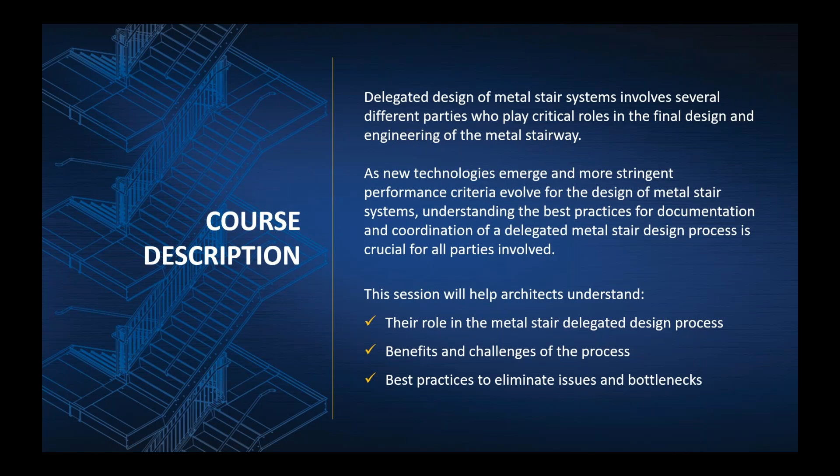This course will help architects, one, describe the delegated metal stair design process and how the roles of each party can increase the safety and efficiency of a project. Explain the benefits of a delegated metal stair design process and how it ensures a safe and durable installation. Discuss the best practices of documentation, BIM coordination, and information flow required throughout the process.

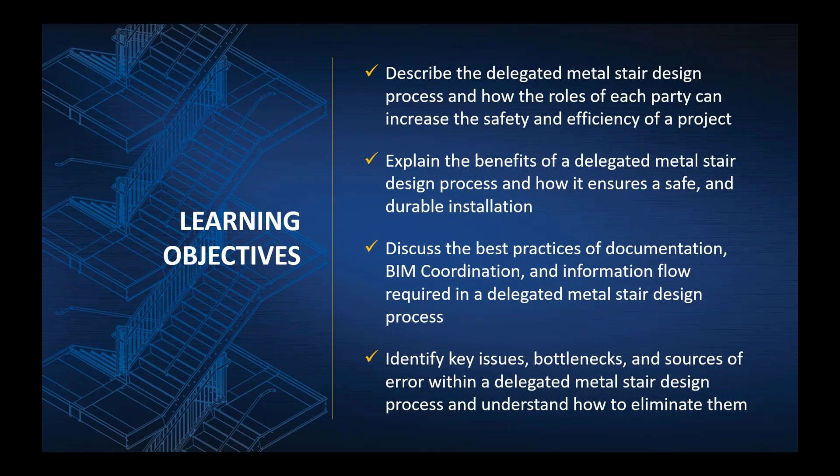And then identify key issues, bottlenecks, and sources of error within a delegated metal stair design process and understand how to eliminate them. So I'll start with just a brief overview of the delegated design process in general and how it relates to metal stair systems.

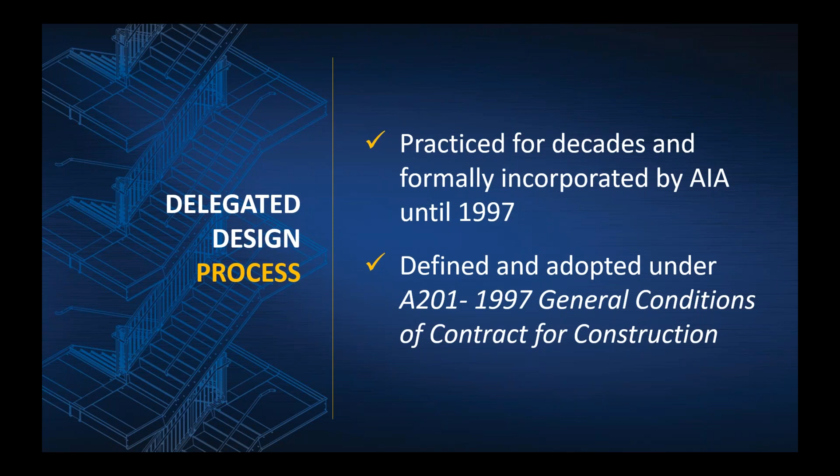The delegated design process has been practiced for many decades. Not until 1997 was it officially adopted under the AIA document A201, General Conditions of the Contract for Construction. And in this document, the AIA inserted the language that must be included for the scope of work to be considered design delegation.

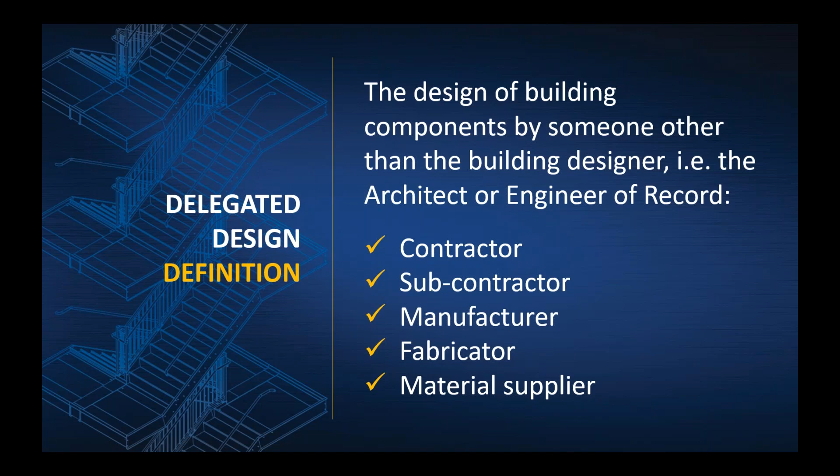And the general definition is that design delegation is design of building components or equipment by someone other than the building designer. It can be performed by the contractor, subcontractor, or equipment manufacturers or fabricators. And it's typically used when components or specialty equipment require specialized engineering skill and know-how, and when the components may differ depending on the chosen solutions.

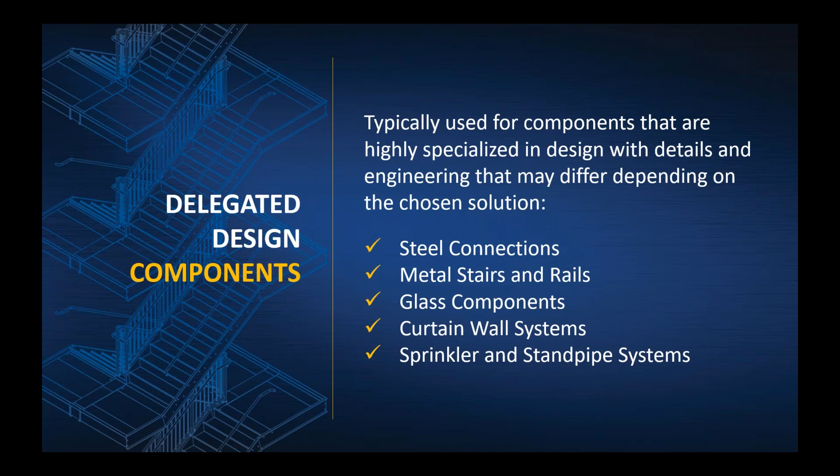So for instance, with metal stairs, they require design of many different connection details and components, and each manufacturer will typically incorporate their own set of different typical details and designs to fit their manufacturing system, while also meeting the design intent of the architect. So having these details designed directly by the manufacturer helps ensure that they are able to be manufactured in a high quality, safe, and efficient way for the project.

Next, we'll walk through the reasons why a delegated design process is used and the benefits. The goal of incorporating delegated design for metal stairs is to lower overall cost, improve the safety and performance of the stair systems, and improve coordination and efficiency of the design process. And we'll talk a little more about how each of these can be achieved.

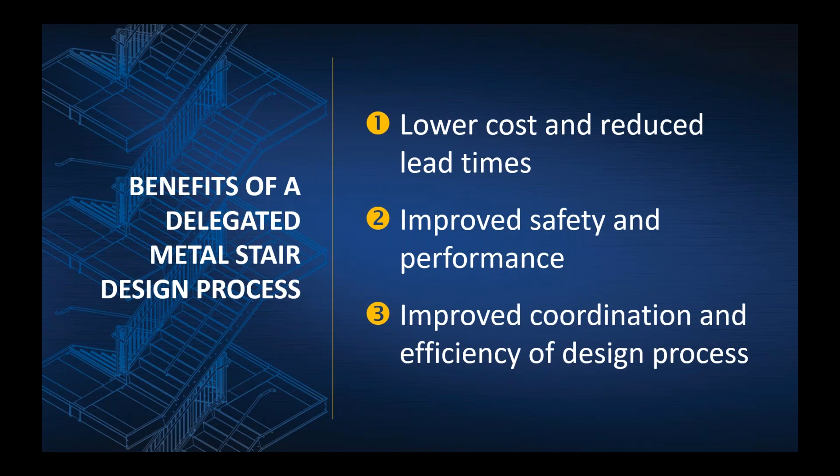So how does it result in lower cost and reduced lead times? Because the designers and engineers work directly for the manufacturer, they will be intimately familiar with the manufacturer's standards for manufacturing. So they will design with manufacturing cost and efficiency in mind. They will also have an in-depth familiarity with installation requirements of their stair system, so they can design for minimal field welding and handling on site.

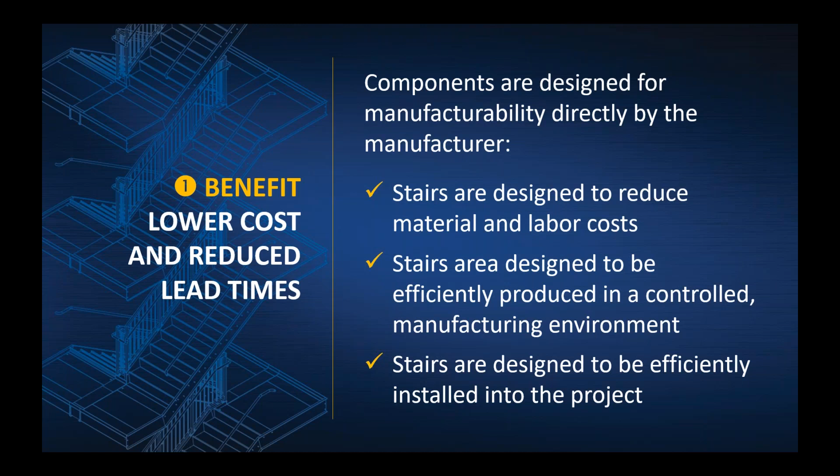The specialty engineer will also have an in-depth knowledge of the specific IBC load requirements and AISC guidance for stair design, so that all of these stair components will meet the load requirements, and the connection details will be designed per AISC guidance. And this is important because it ensures that the stairs will be designed with maximum safety and durability in mind.

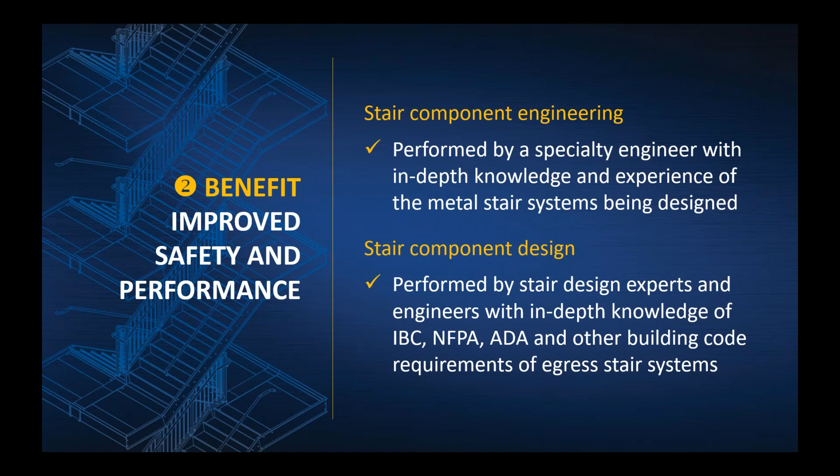And then finally, a benefit is that it reduces design time for the architect or building designer in a couple of ways. One, the architect can incorporate information directly from the stair manufacturer into their documentation, such as typical details or specifications. The other way is that it delegates the detailed design work to the manufacturer, who will typically have more in-depth knowledge of the details of their systems, and will also have many aspects of the systems pre-engineered or pre-designed, which further contributes to a faster, more efficient process and frees the architect to focus on other design aspects of the project.

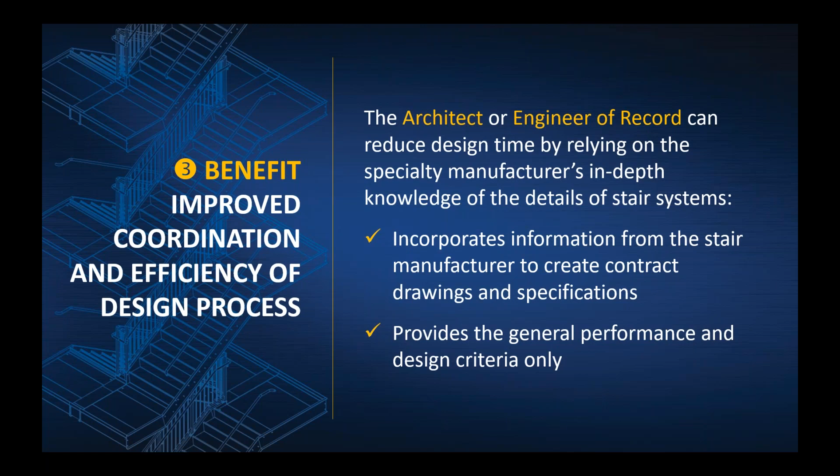In this next section, I'll talk about the roles of the architect and stair manufacturer and the documentation provided by each. The AIA document A201 provides the framework for the delegated design process. And first, it requires that the architect specify clearly that the scope of work in question, in this case, the design and engineering of the metal stair systems, is intended to be a delegated design component. And that should be clearly stated in the contract documents.

Second, the AIA A201 document requires that the architect specify the performance and design criteria for the metal stairs, and that the design of the metal stairs require professional design services or certifications related to the systems being provided.

And then finally, the architect would be responsible for reviewing and either approving or taking the appropriate action for the shop drawings or other product or quality submittals by the stair manufacturer, and checking for conformance to the design and performance criteria. So in this role, the stair manufacturer will be responsible for submitting a design which conforms to the contract documents, while the architect is ultimately responsible for reviewing and ensuring that it does conform to the contract documents, and particularly to the governing building code.

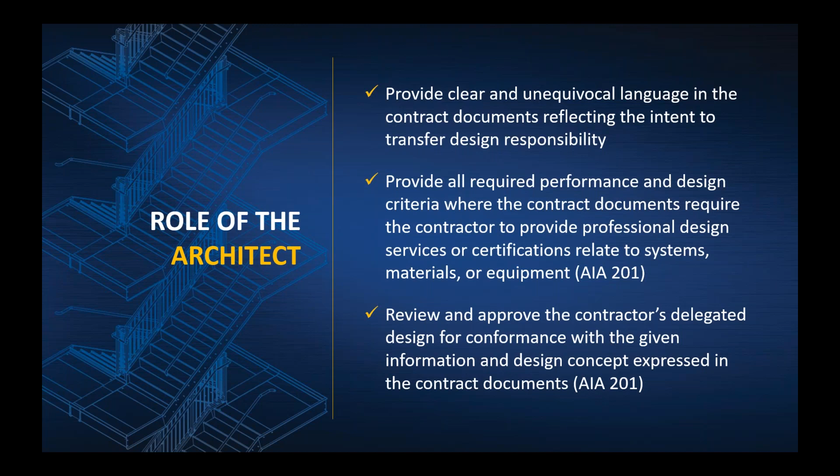The role of the stair manufacturer in the process is also threefold. First, the stair manufacturer must carefully study and compare the contract documents to understand all the design and performance criteria indicated in the documents. This will generally include a review of the architectural drawings, structural drawings, and notes in the Division 5 stair specifications.

Second, after conducting the review, the metal stair manufacturer should report to the architect any known errors, inconsistencies, or omissions discovered. And this would pertain obviously only to the specific metal stair scope of work. And I'll go through a little later some of those common issues discovered during this review period.

And then finally, the manufacturer should design the metal stair systems to conform to the design and performance criteria as indicated in the contract documents, and must make the appropriate submittals to document that conformance.

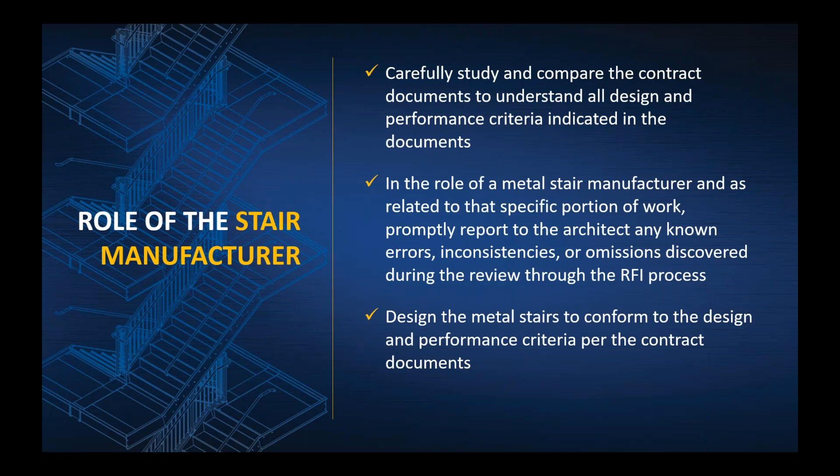In this section, I will provide an overview of the design documentation and submittals required for a metal stair delegated design. The primary source of information for the stair manufacturer from the architect is the set of contract documents, and this will serve as the governing documents to which the stair manufacturer will conform their design. The documents, as it relates to metal stairs, typically include the architectural and structural drawings and specifications.

Often the architect can also provide BIM models of the building or stairwell. And the BIM models can be extremely helpful for the stair manufacturer, especially in identifying and locating clashes between the stair system and the surrounding building structure. One important consideration is how the BIM models should be incorporated into the design, and whether they should be used as a reference document or as a governing design document.

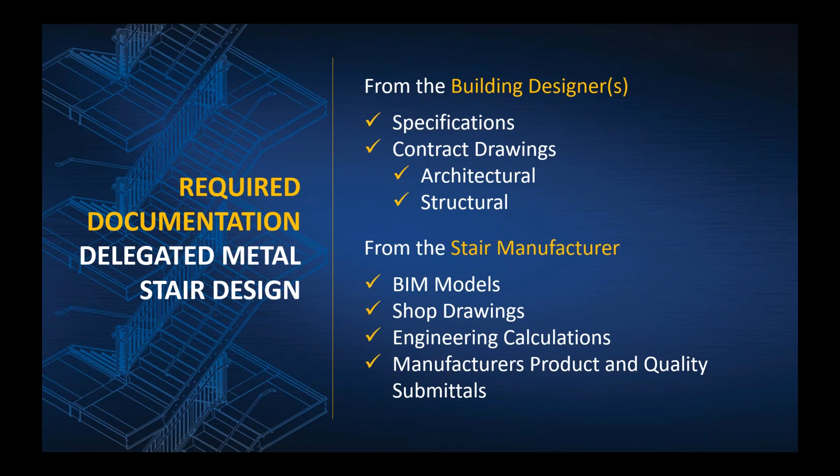So prior to use of models, the stair manufacturer will want to have some documentation as to how the BIM model should be incorporated. And then documentation from the stair manufacturer will include a series of submittals, typically BIM models, shop drawings, engineering calculations, and any other product and quality submittals. And this is an overview of the documents and information that should be included in each document.

The information from the architect as laid out in the architectural drawings will usually include stairway layouts, egress dimensions and layouts, direction of travel, stairwell dimensions, of course the governing building code, and then details to indicate design intent for guardrails, handrails, and other product information.

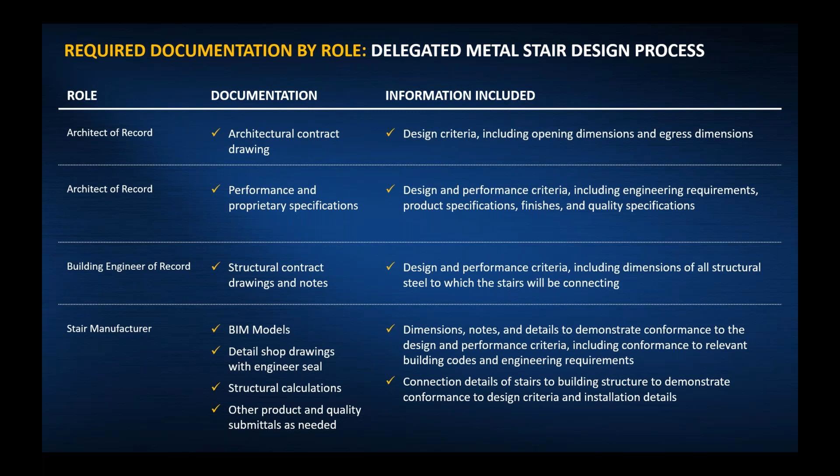The engineer of record would provide additional information through the structural drawings and notes and details in the structural drawings. And the information from the structural drawings would generally need to include slab and beam dimensions and sizes to which the stairs are connecting. And then again, the stair manufacturer will provide a series of submittals to demonstrate conformance to the contract documents, and we'll go through those in more detail.

If it's an IBC accessible stairwell, the distance between handrails might be relevant. And then, of course, typical details to show the design criteria of the treads, risers, nosings, guards, and handrails. And we'll go through some examples in the next few slides.

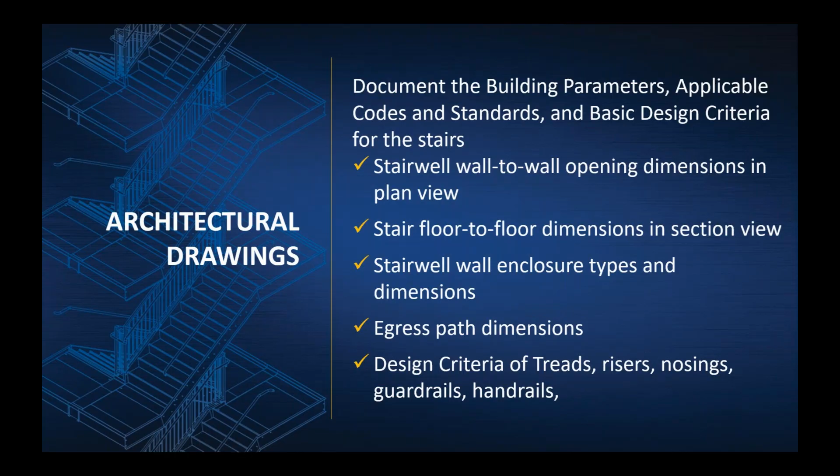So typically the architectural drawings will include enlarged plan views of the stairwell openings to indicate all the necessary dimensions. Two of the most important dimensions are the wall-to-wall overall stairwell length and width. Also on these enlarged plan views, the door locations.

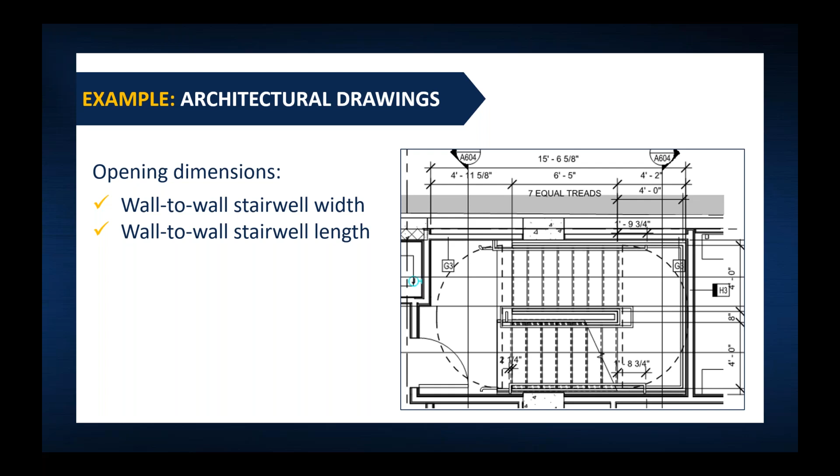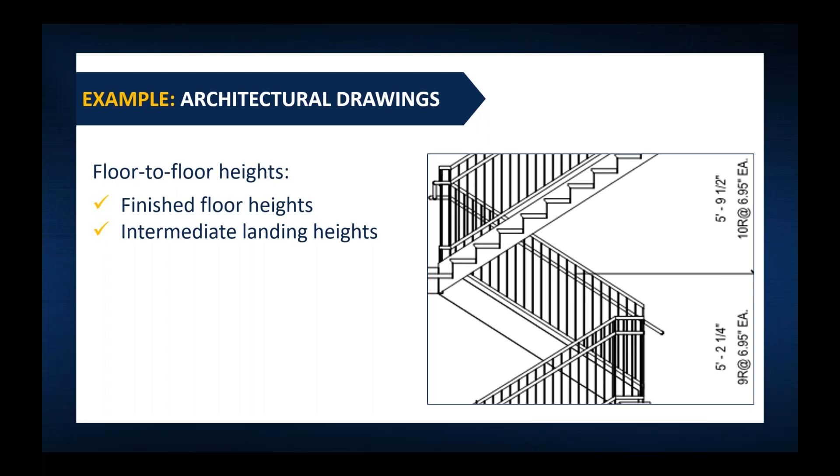And the enlarged section views typically will show the finished floor-to-floor heights, which is the most important dimension needed for the stair manufacturer, the intermediate landing height, and individual stair riser heights. And if the intermediate landing heights and stair riser heights are not indicated, the stair manufacturer will typically assume an equal riser and flight height for each of those.

The enlarged plan views should also indicate the wall construction and wall types and the widths of the wall enclosure, which is needed by the stair manufacturer to design the landing supports, which are typically hidden inside the walls. The stair egress widths, which is the clear width above the handrails between guards and or walls. The landing widths.

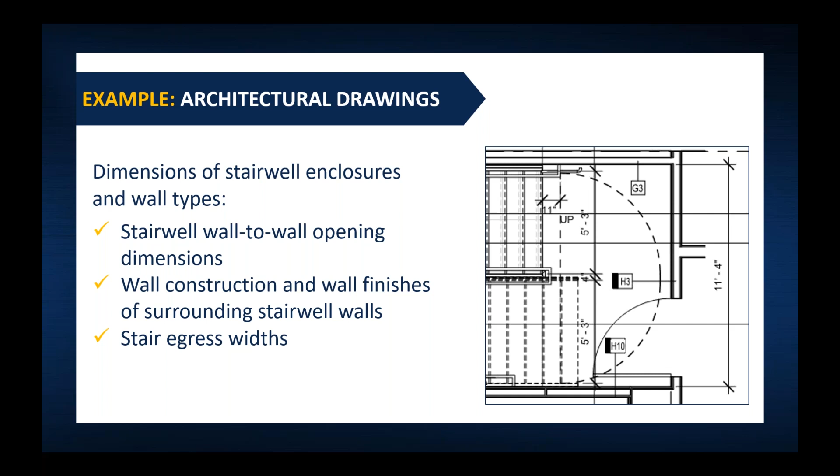In the details section, there will be a few general design criteria details needed by the stair manufacturer to successfully design the stairs, starting with tread and riser design intent. Most importantly, the tread type. In this example is a concrete pan stair. Riser heights and tread depths, and here is showing the 7-inch max riser and 11-inch min tread per IBC.

The riser type and whether it's a closed riser or open riser. And an important note with architectural details and how they are incorporated or used by a stair manufacturer. The stair manufacturer will have its own standard details for treads and risers, which are designed to reduce costs and lead times for manufacturing. So including a note here in the details section that the stair manufacturer's standards will be acceptable can help clear up some confusion later on in the process.

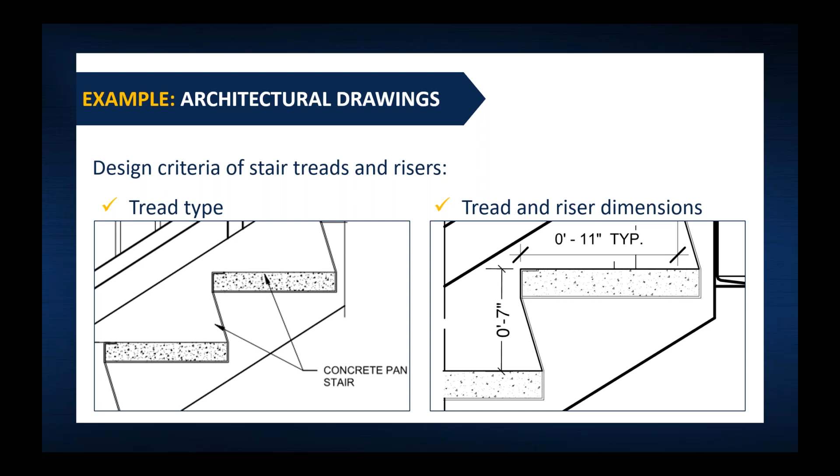The guardrail details primarily will indicate the design intent and the code criteria. From a design intent perspective, the details should indicate the guardrail infill design, in this case a vertical picket type guardrail. The posts design, including if there are any specific material types or profiles for the guardrail posts and frame, and then the handrail design.

From a code perspective, the primary items and dimensions the stair manufacturer will be looking for are the guardrail heights, handrail heights, infill opening spacings, and handrail extension dimensions. If these dimensions are not all indicated on the architectural drawings, the manufacturer will typically design the railing per its own standards to meet the applicable building code.

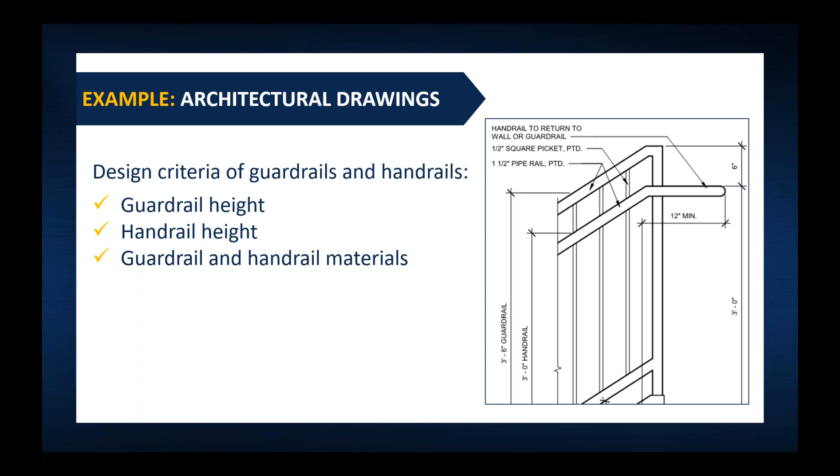And again, as noted in the last slide, the stair manufacturer will have its own standard guardrail and handrail designs to reduce costs and lead time, which can often differ in small ways from architectural details. So including any specific notes as to which details should be strictly adhered to, or if the manufacturer standards will be acceptable, is always beneficial.

Next, we'll go through the information in the specifications. Before I go through the specific information, I'll run through a quick overview of the different types of specifications and how they relate to the delegated design process for metal stairs. A performance specification is the most common type used in this process, and it dictates the performance requirements, but allows for multiple manufacturers to propose their own systems, and allows for freedom for the chosen manufacturer to design using their own standard systems.

A proprietary specification can also be used here. It's typically a specification that is used with a stair manufacturer's proprietary system, whether it be a performance, tread, or railing system. And then a prescriptive specification, typically not used here because it would defeat the purpose of the delegated design process, which is to gain the efficiencies and reduce costs by leveraging the stair manufacturer's knowledge in stair design and engineering.

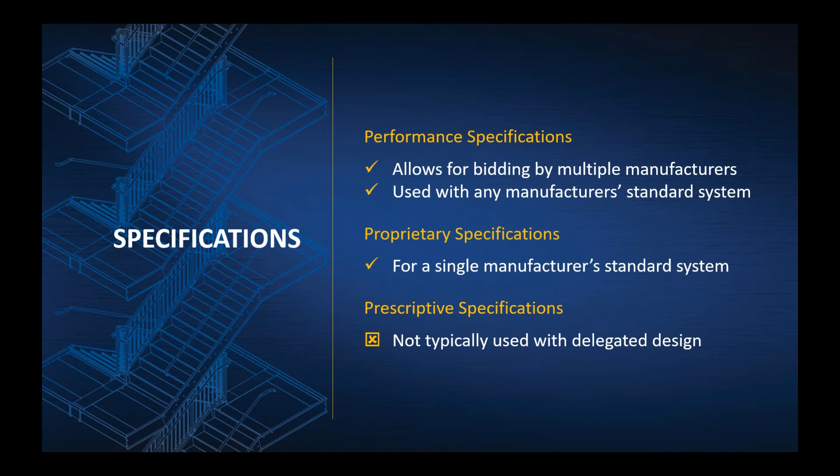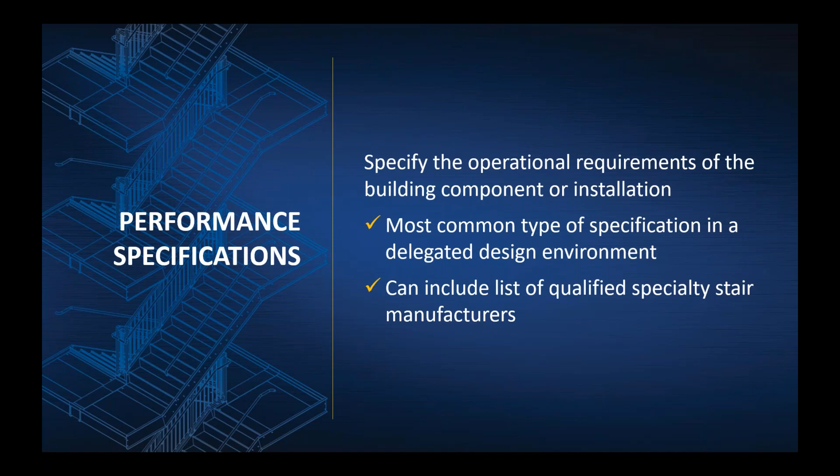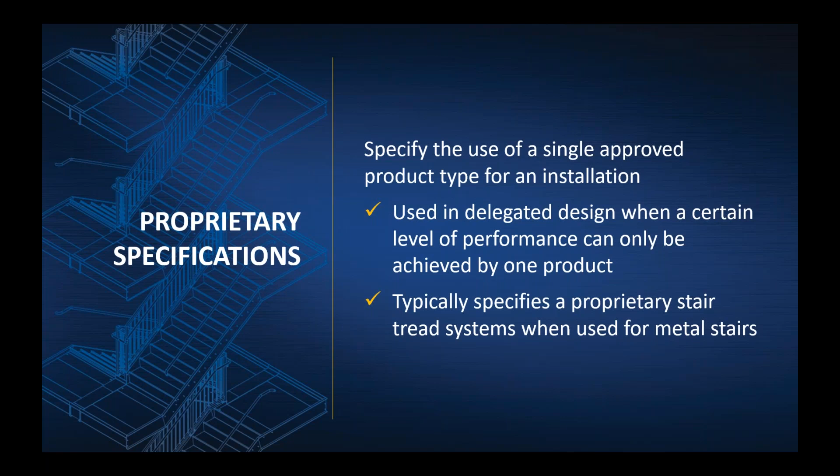So again, the performance specification, most common type used, and it allows for multiple stair manufacturers to propose their systems, and it often can include a short list of qualified manufacturers to meet the performance criteria. Again, a proprietary specification is typically used when a certain level of performance can only be achieved by a single product. In this case, relating to stairs, typically when there is some sort of performance tread or railing system. And as discussed, the prescriptive specification is not often used.

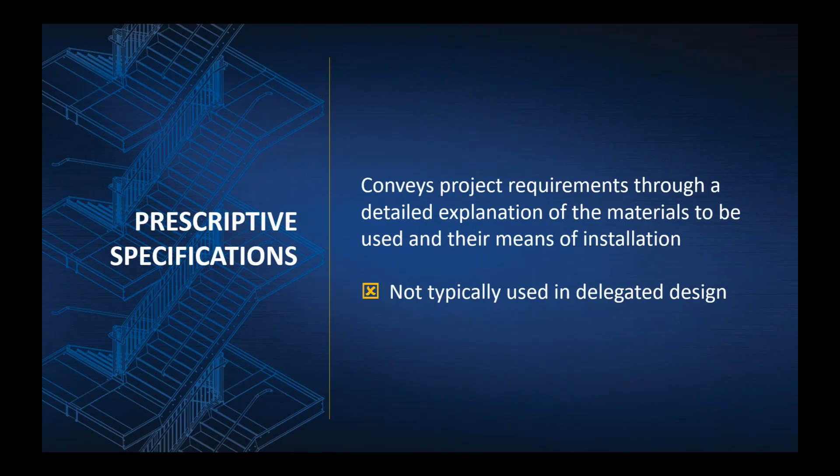The specification will have additional information needed to design the stair systems. First, most importantly, the engineering or structural performance requirements for the stairs and guardrails and handrails, usually per IBC live load specifications. It will also usually include a manufacturer's qualification statement, product and material requirements, submittal requirements for shop drawings, quality, LEED, or other product information such as samples, finishes for primers, finish paints, and weld finishes, and then of course installation requirements.

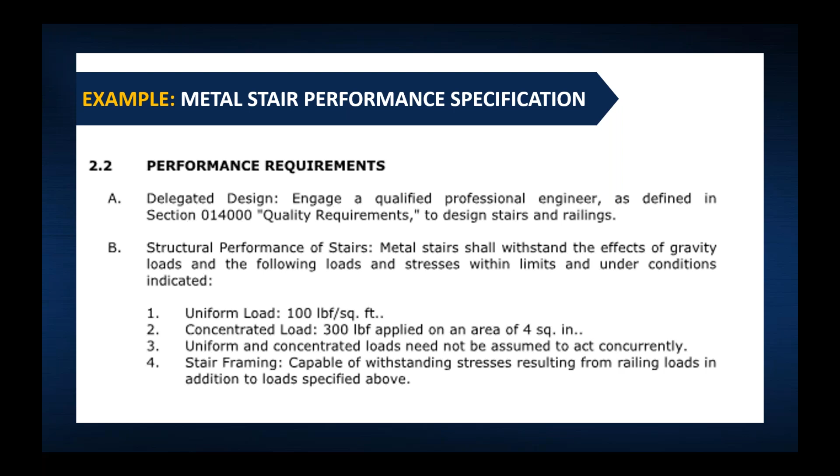So what is needed in the performance specification? One of the important criteria listed in the performance specification is the requirement for enlisting a professional engineer to oversee the stair design and stamp and seal the drawings. And again, it'll also usually include the structural performance of the stairs.

Additional information: it will list the manufacturer's qualification for quality. The specification document should list some minimal quality criteria for the design of the metal stairs. And this might include that the stair manufacturer should have a minimal number of years performing similar work. Stairs should be designed under the direct supervision of a structural engineer licensed in the state of the project. And then all welders should be qualified under an AWS certified weld inspector.

Other design criteria that may be included can indicate the level of finishes for the welds of the stairs. And there's two organizations who have created standards. The National Association of Architectural Metal Manufacturers has classified stairways by different classes according to different uses. Industrial class stairs are primarily functional with limited weld finishing. Service class stairs are also primarily functional but designed with appearance in mind. Visible welds in the travel area would be ground smooth.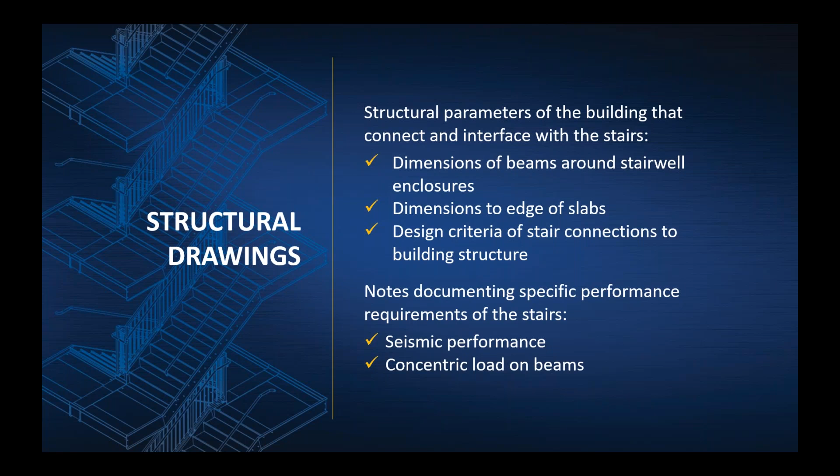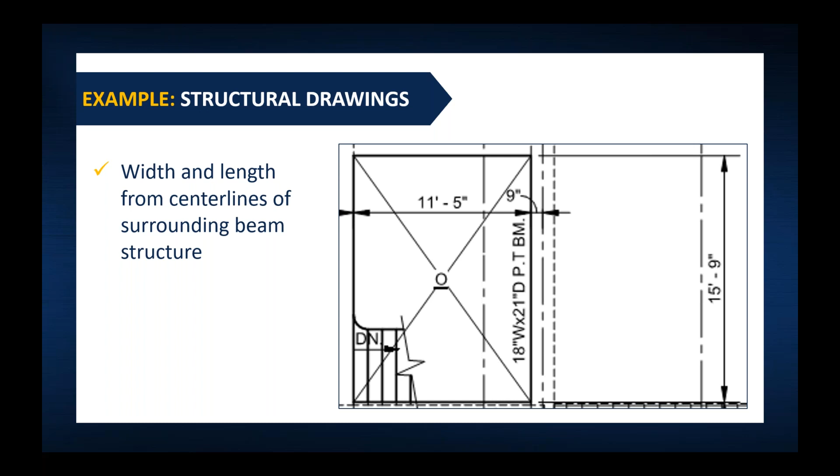In a structural steel building, perhaps the most important dimension required for designing the stairs is the stairwell opening dimensions from the center line of surrounding structural steel beams, which is needed to design the connections from the stairs to the beams. In a steel building with floor slabs, the dimensions from the floor slab to the center of beam is necessary to design the connections from the stairs to the floor levels.

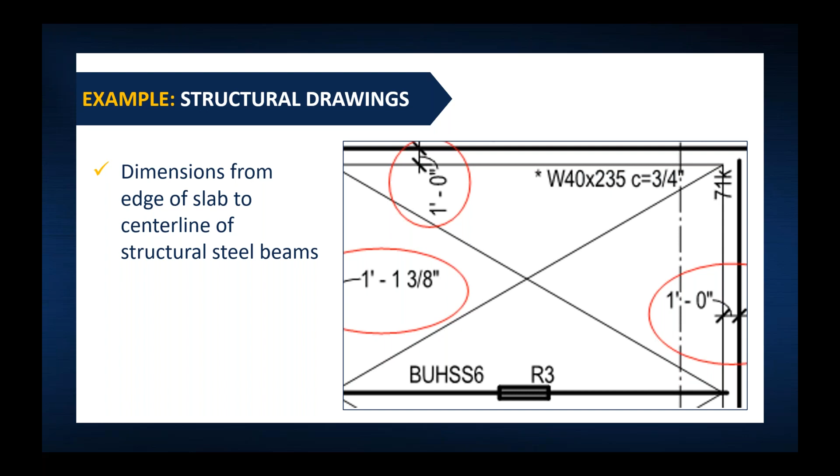In many cases, the stairs will need to be designed with other performance criteria, such as seismic loading, or another criteria is that stair loads may need to be imposed as concentric to the structural steel beams. This is a design requirement that's been recently recommended in the AISC Design Guide number 34 for steel framed stairway design. And it typically requires that any hangers from the stair landings to the beams fall directly under the center of beam rather than to the side or the web of the beam.

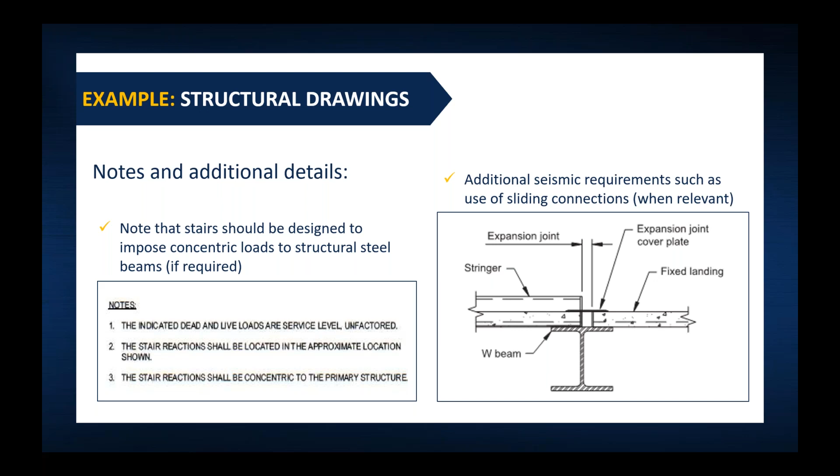And if for some reason hangers cannot be located directly under the beams, and one reason they might not be is because of other design constraints, such as hiding the hangers within the walls, there may need to be additional kickers added to resist torsion on the beams by the stairs. And the stair manufacturer will need to know that, and that would usually be included in the structural steel details or notes.

So we've gone through the requirements from the building designers, and I'll now cover the documentation that the stair manufacturer should provide to demonstrate conformance to the design and performance criteria. And the stair manufacturer, as noted, will typically submit a series of documents and other file types, including BIM models, shop drawings, engineering calculations, and other product and quality submittals or samples.

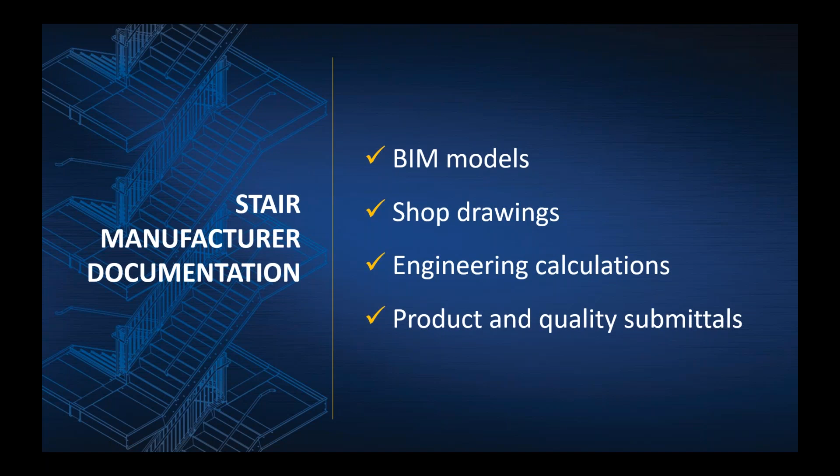If the manufacturer is working in a steel modeling software program, the manufacturer can provide BIM models of the stair systems to be directly incorporated into the building BIM model. And this allows the stairs to be integrated into the overall BIM coordination process and for the building designer to perform a clash detection check.

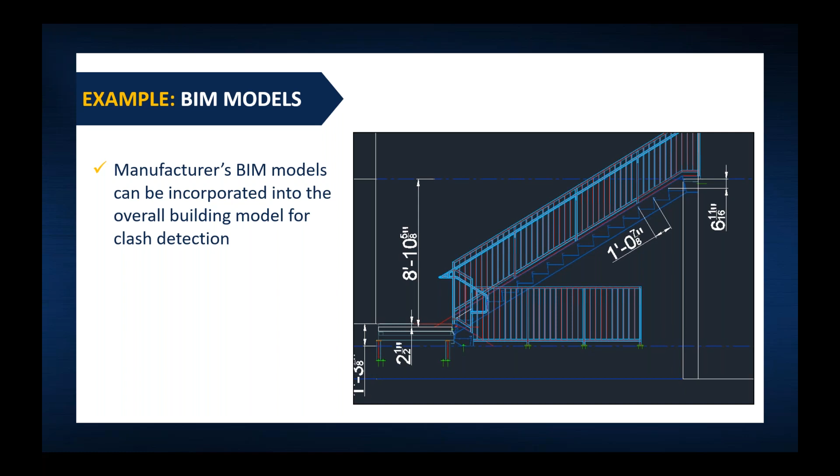The manufacturer's shop drawings or approval drawings should demonstrate conformance to the architectural drawings and the structural drawings and specifications. At a minimum, they should include all the dimensions in the plans and section views, the connection details to the building structure, and then other details to show conformance to the design intent and the performance requirements, and of course the code compliance.

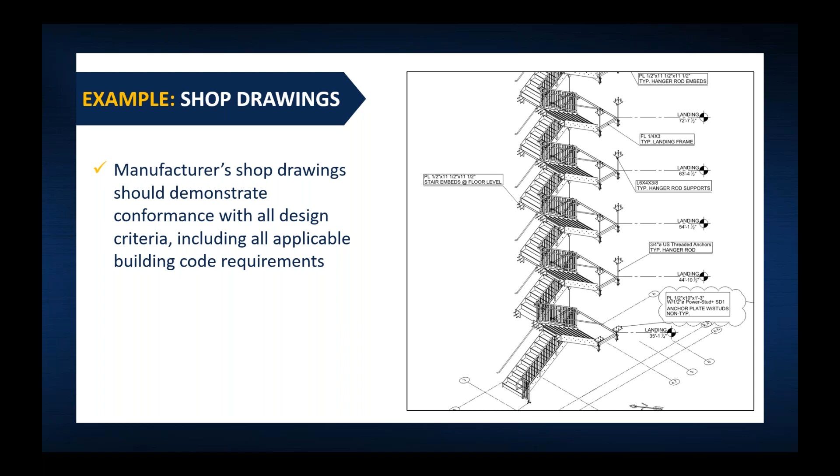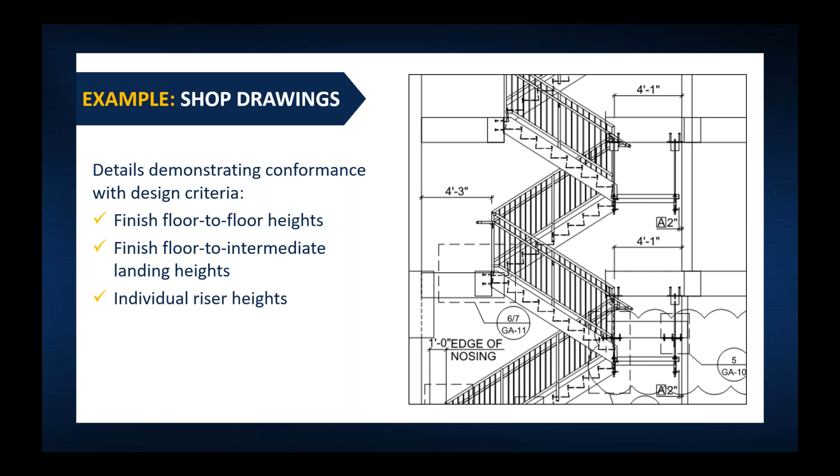So similar to the architectural drawings, the stair shop drawing should include enlarged plan views and section views. In the enlarged section view, the shop drawing should indicate the floor-to-floor heights and riser heights. In the enlarged plan view, the shop drawing should show, again similar to the architectural, the wall-to-wall dimensions, egress dimensions, the landing dimensions, other dimensions to building grid lines, and the surrounding wall construction type.

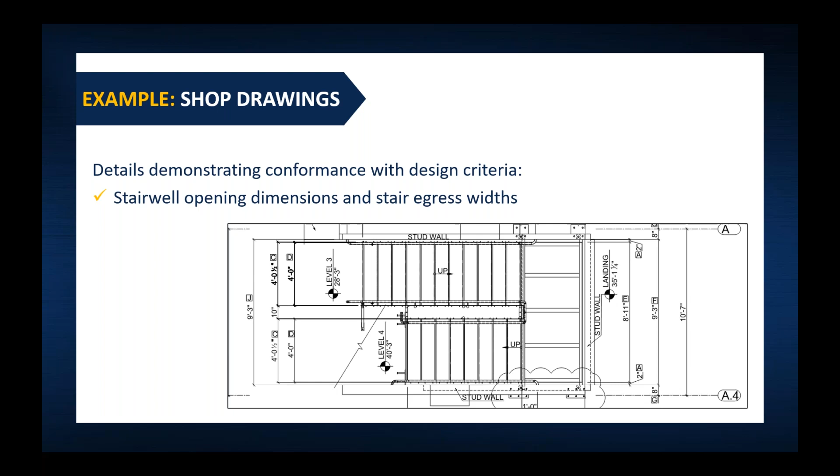Shop drawings should show details to indicate how the stairs will be connected and installed into the building. So that would usually include the details of any welds directly to the building, hanger or column support structures for the landings, any other embedment plate details, and then details of how the stair flights connect into the building at the floor levels.

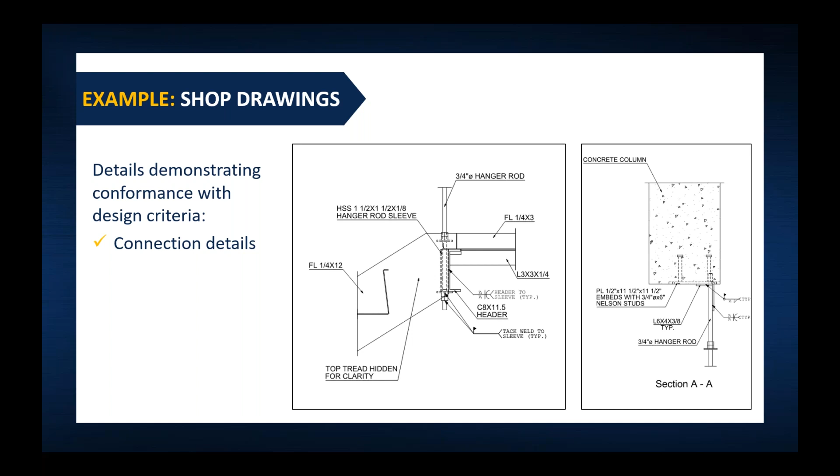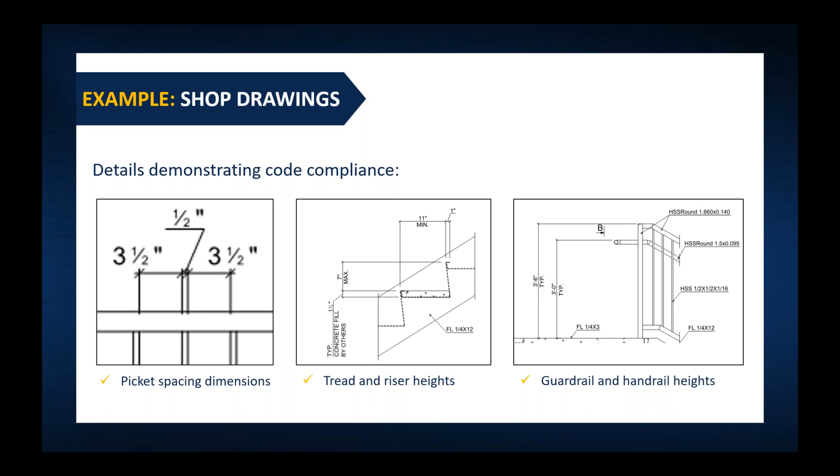Shop drawings should include a series of typical details to show code compliance of the guardrails, handrails, risers, and treads, and also to show conformance to the design intent. This would be typically for code compliance, the picket spacings, tread and riser heights, guardrail and handrail heights.

And the stair, as we mentioned, must be designed under the direct supervision of a structural engineer. A stair manufacturer will typically have many of its components pre-engineered, so they will incorporate a large degree of pre-engineered components. The structural engineer will then perform an engineering analysis and calculation on the final stair configuration as it's designed.

The calculations will demonstrate that the stairs will at minimum pass the load specifications per the contract documents, and all engineering work should be performed under the AISC Code of Standard Practice for Steel Buildings.

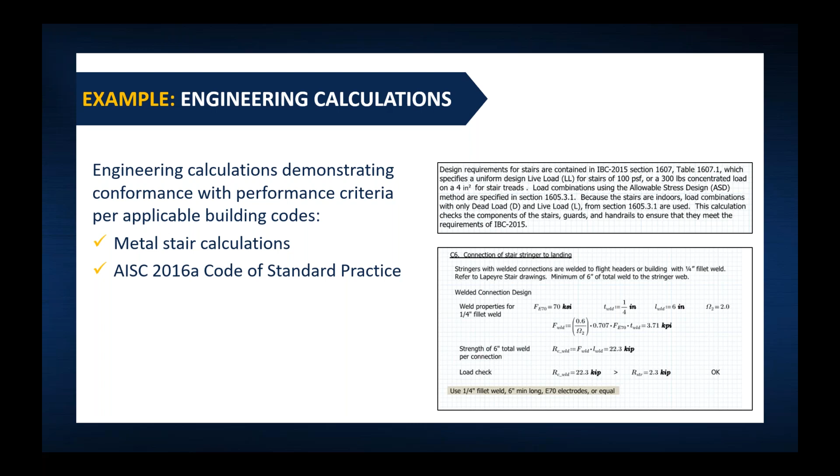Other submittals by the stair manufacturer might include the primer or paint specifications, product samples for demonstrating the rail weld finishes or tread finishes, the welder certifications, and then other certifications or quality procedures and manuals.

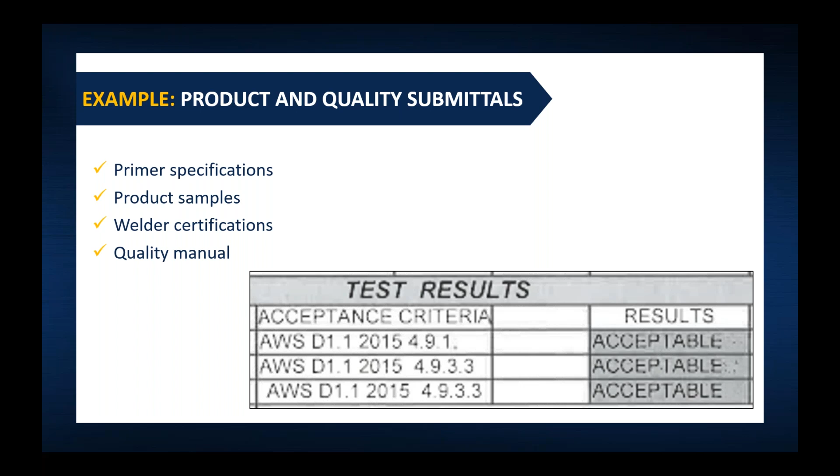And then the stair manufacturer creates detailed design models in a steel detailing software, produces the shop or approval drawings, and performs the initial engineering analysis and calculations at that time. Then the architect will review and approve the drawings for conformance and will make any notes for revision, and the stair manufacturer will then make the corrections and either resubmit for approval or proceed to final engineering analysis and fabrication.

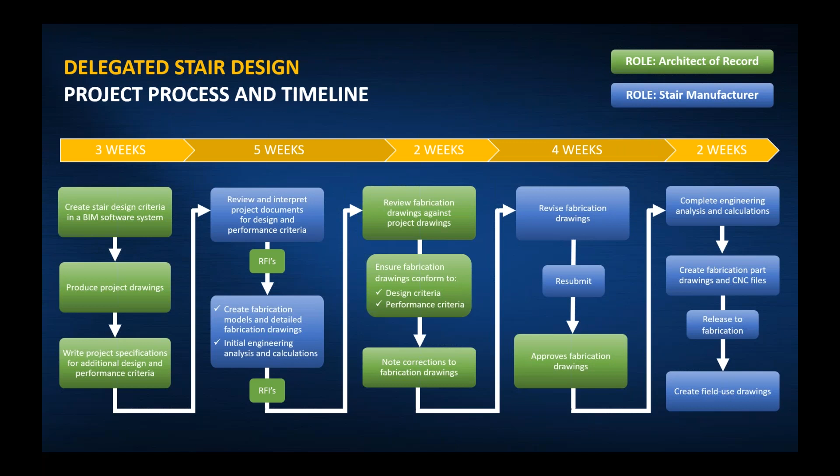And the overall process from when the stair manufacturer receives the design documentation could be anywhere from 6 to 12 weeks, depending on the clarity of information, the need for RFIs, and the need for revisions to shop drawings. So with the amount of time varying so much, we'll walk through the typical issues and bottlenecks that arise throughout this process.

So most of the issues arise from one of three key sources. Missing information in one of the documentation sources, whether that be dimensions or details. There could be conflicting information, because there are multiple sources of information. And there could be different ways to interpret information as shown in any of the sources of documentation.

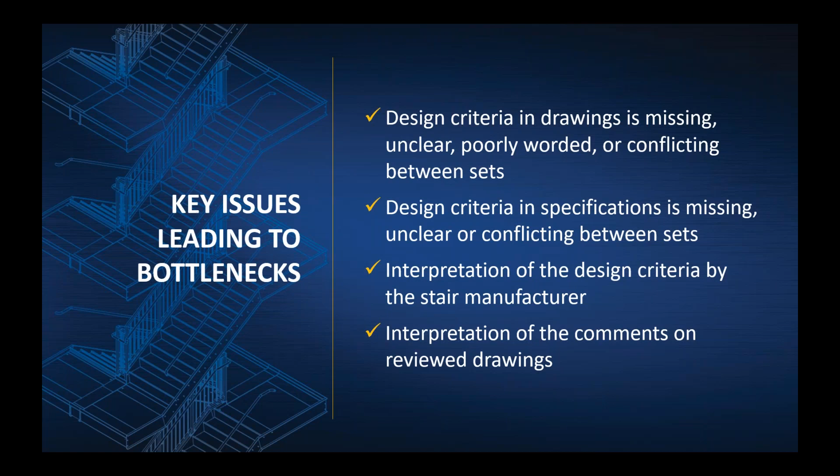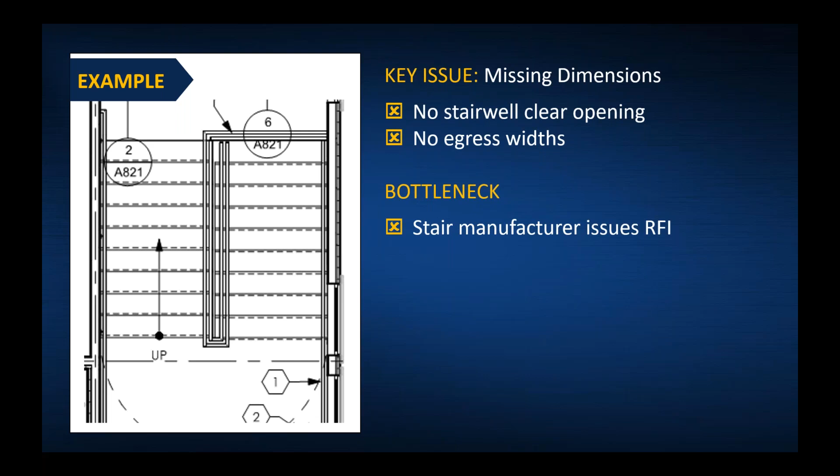Missing dimensions in the contract documents that are needed to design stairs. These may include, as we went through, the wall-to-wall opening dimensions, egress dimensions, or floor-to-floor heights. Whatever dimensions are missing, the stair manufacturer will issue an RFI to clarify. And again, just a section view without floor-to-floor height dimensions will trigger an RFI from the stair manufacturer.

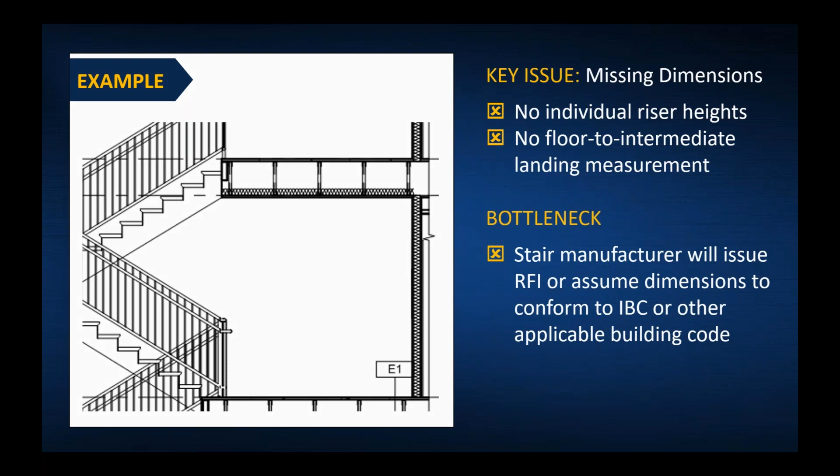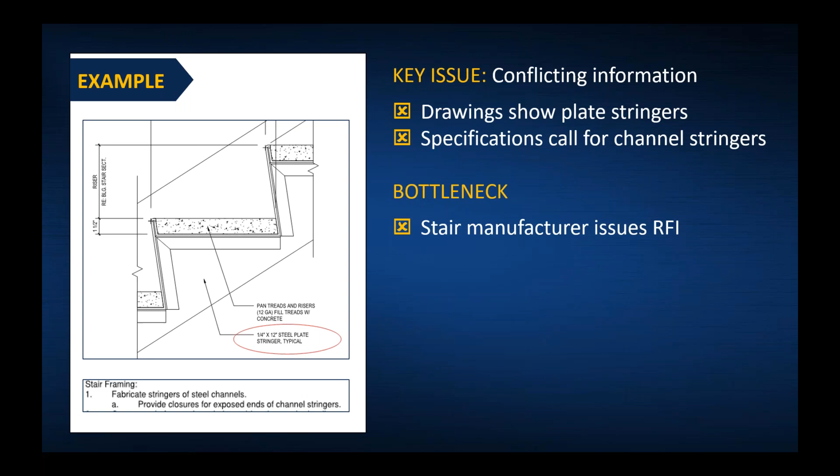Other times there could be conflicting information between drawing details and specifications. In this example, there would be a stringer profile that's different in the drawings from the specification, a plate versus a channel. And again, this will trigger the stair manufacturer to issue an RFI to clarify the correct stringer profile.

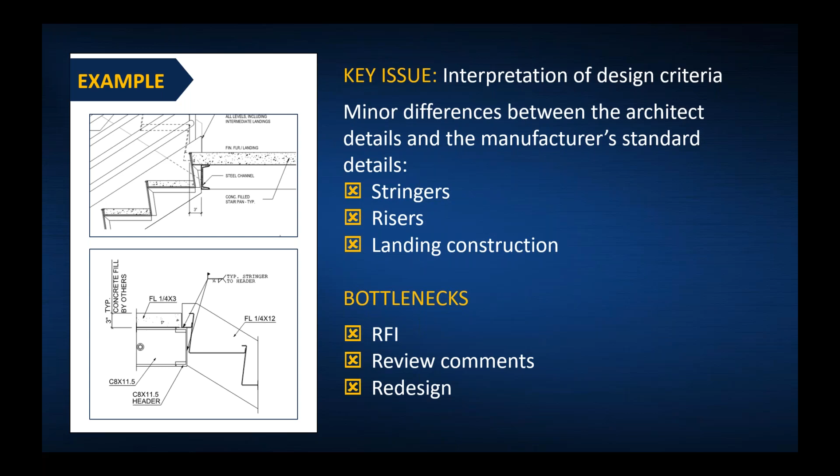As mentioned earlier, there are often small differences between an architectural detail and the stair manufacturer's standard detail. This could be anything from riser bend radiuses, nosing configurations, tread carrier angle profiles, various small details that go into designing the stairs. So any notes stating that these stair manufacturer's standard details are acceptable or not can help with these types of interpretation issues.

Additional interpretation issues are marked up approval drawings, whether there's multiple reviewer comments on the same drawing sets or information that's difficult to discern. Often here, the stair manufacturer may request a call directly with the architect to help clear up confusion on any of these types of comments.

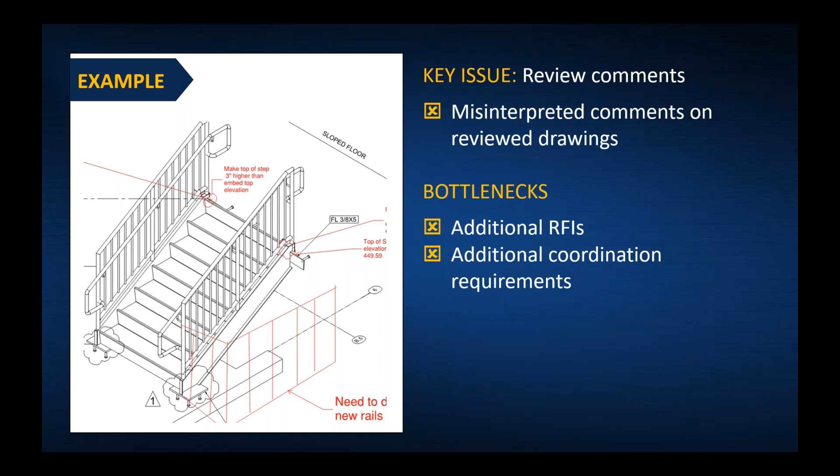So now we'll go through some of the best processes and practices to help streamline the delegated design process for metal stairs. So, the most obvious one is to make sure that the dimensions we've laid out are included on the enlarged layouts and section views. One way to eliminate issues is to incorporate information directly from the stair manufacturer into the documents, whether that's typical details from the stair manufacturer or BIM models or specifications.

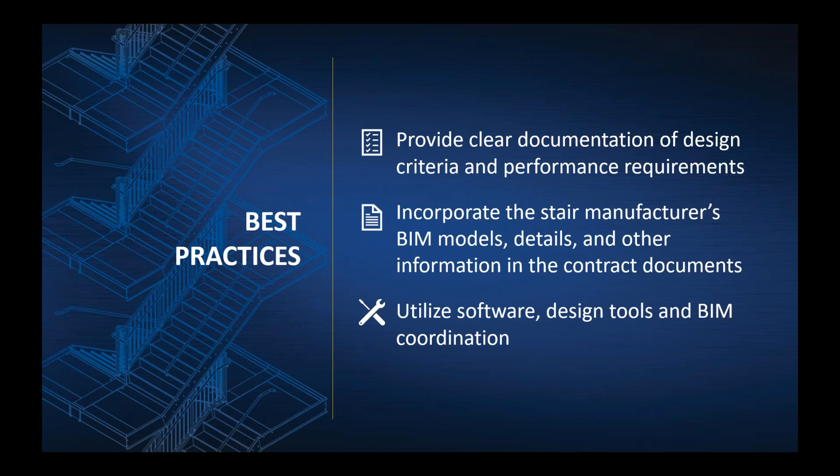And then adding the notes that stair manufacturer's details will be acceptable. And then finally, using tools from the manufacturer to help with the initial stair design and layout so that downstream design issues are reduced or eliminated.

So providing clear documentation starts with the dimensioning of the enlarged plan and section views in both the architectural and structurals, ensuring the slab and beam locations to which the stairs are connecting and the beam types and sizes, and then indicate design criteria as necessary, such as stringer profiles, railing profiles and types, and any other conceptual details.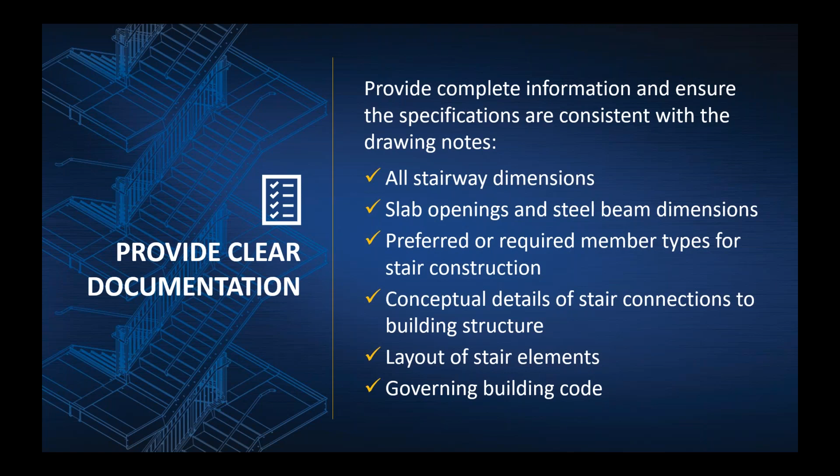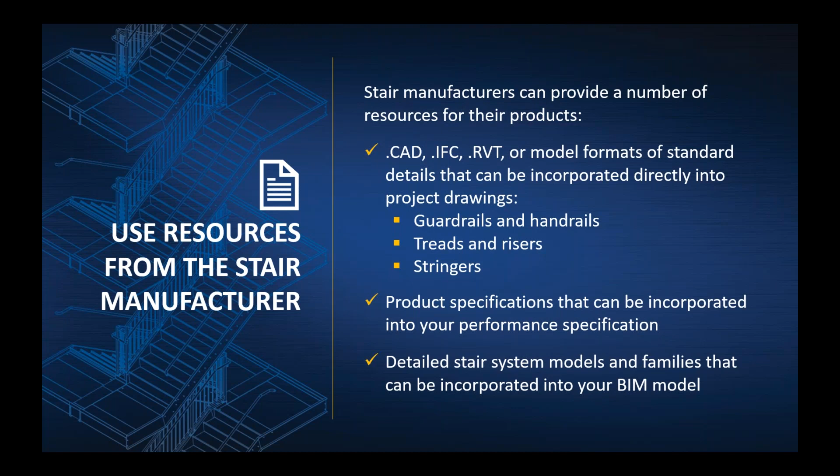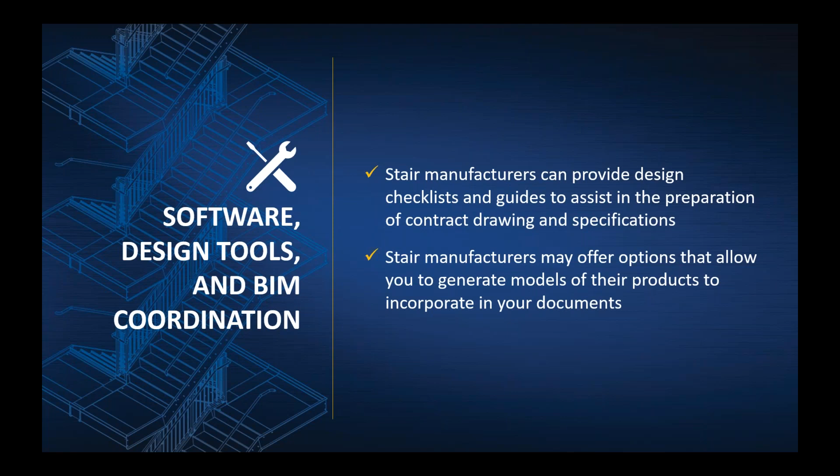Many stair manufacturers have various resources available to help architects with the initial stair layouts and design. This includes code compliance checklists, typical details, BIM models, specifications, and modeling applications that can create more detailed stair designs and models. And again, the stair manufacturer can provide guides and tools such as a code compliance checklist or model generators or software tools to help design the stairs.